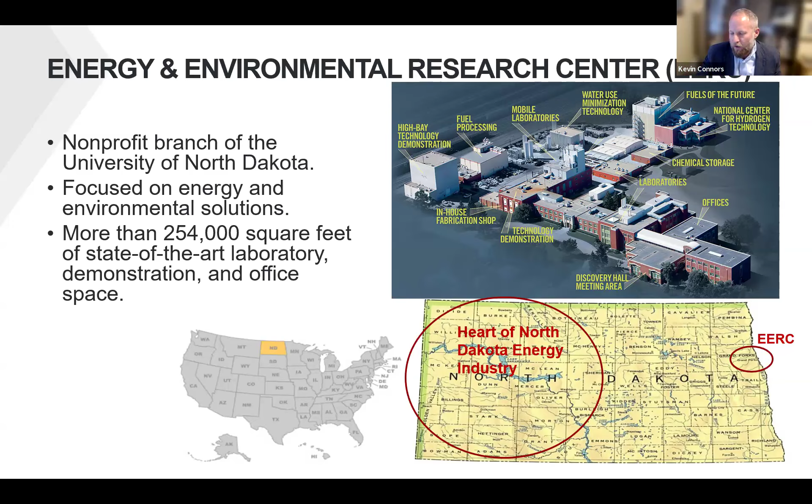The EERC has been working in CCS and CCUS for over 20 years, and that's what I'll focus the rest of my presentation on. We have a long-standing research and development program at the EERC that we manage called the PCOR Partnership. Today I manage the PCOR Partnership. We've been performing applied research in CCUS for over 20 years. We started out characterizing our region.

You can see in North America today there's 4 regional partnerships that are looking at advancing CCUS across their respective regions, and the EERC manages the Northern Great Plains, Northwestern region of North America. It's the PCOR Partnership region. It's a 10-state, 4 Canadian province region. And we started out really just characterizing the region, trying to answer the question, is CCUS a viable option in this region of North America?

We quickly got to the answer yes, and we began characterizing the subsurface, the geology, and identifying the ideal rock formations for large-scale CO2 storage. That led to pilot testing and field demonstration where we partnered with industry to do some small-scale injection. And then we had a commercial demonstration phase where we worked with an industry partner to demonstrate 1 million tons of CO2 injected and permanently stored within a 12-month time period, and we were very successful there. And today we're focused on commercializing this set of technologies.

Just want to maybe step back and talk about carbon dioxide. Carbon dioxide is a commodity. That's the position that we've taken in terms of advancing this set of technologies, and carbon dioxide certainly has a use specifically in the oil and gas industry. And Alex mentioned that in his intro through using CO2 for enhanced oil recovery.

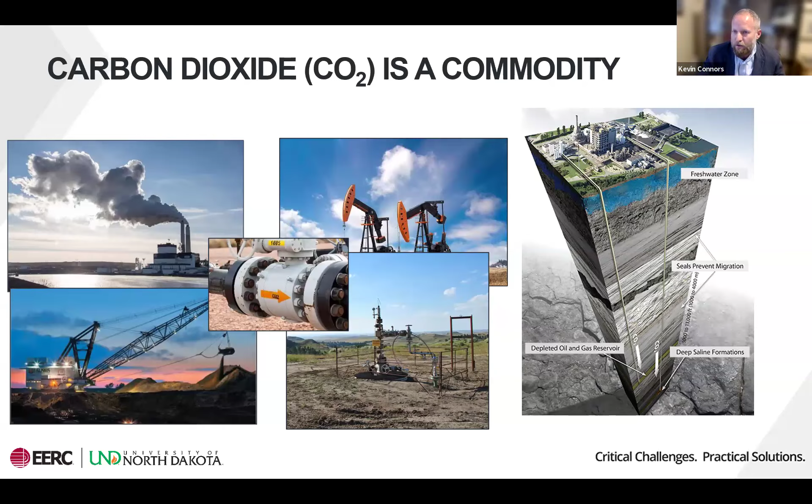Some key terminology that we're going to be using: the dedicated storage. We're talking about injecting CO2 into a rock formation that is non-oil and gas bearing. In other words, it's a high saline or saltwater formation, and the primary purpose is permanent storage.

When we talk about associated storage, we're talking about injecting CO2 into an oil-bearing reservoir, typically a depleted oil reservoir, to improve or enhance that oil recovery, so you're able to use that CO2 as a working fluid to produce more oil. And the CO2 is stored in association with that activity, and it's permanently stored in the reservoir. And I'll talk a little bit more about that process.

We have the 45Q tax credit, which today is a driver. It's an incentive for the industry to capture CO2. And the federal tax credit today is at $85 a ton for point source capture for both dedicated storage and associated storage. There's also a tax credit for direct air capture, but I'll be focused on CCUS today.

Pore space, when we talk about it in terms of the geology, is the tiny spaces in the rock grains of a geologic formation. It's going to be occupied by fluid. When we talk about porosity and permeability, those are the terms we use to describe the quality of the rock reservoir. And then I'll talk a little bit about cap rock.

These are layers of rocks that are impermeable that sit above and below your storage reservoir or the formation that you're looking to inject CO2 into, and your cap rocks are acting as a containment for that injection activity. Cap rocks are going to be naturally occurring if you have an oil and gas reservoir. They're trapping that oil and gas in place, and that's why the oil is there.

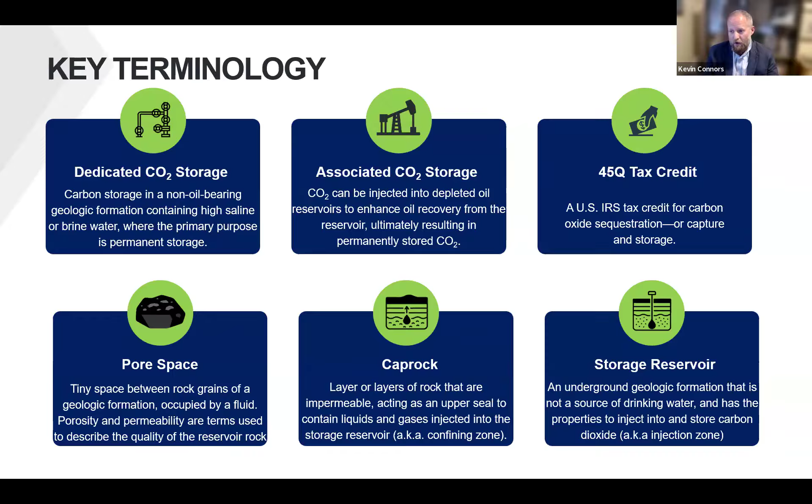We typically call that the injection zone, and we call the cap rock the confining zone. So a couple different interchangeable terms there. When we talk about carbon capture and storage, we're talking about capturing carbon dioxide off of an industrial facility, compressing that carbon dioxide and preparing it for transportation and injection, and then transporting that CO2 to an injection well. Alex mentioned it in his intro.

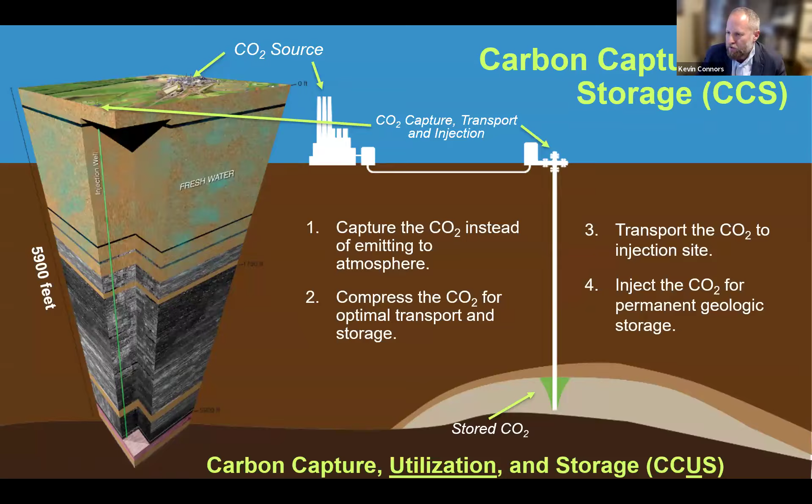So a dedicated storage injection well is a Class 6 injection well. It's been classified by the EPA for large volume CO2 injection for the primary purpose of geologic storage. So in a non-oil bearing reservoir, that's a Class 6 well. We also inject CO2 through a Class 2 well. That would be for injection for the purposes of enhanced oil recovery. And that's where we get carbon capture utilization and storage, or the U in CCUS is for utilizing that CO2 to recover more oil. So two different types of injection wells, both are regulated in a manner that protects underground sources of drinking water and protects the environment.

When we talk about enhanced oil recovery, again, capturing CO2 from an industrial source or CO2 that's naturally occurring in the subsurface has also been used since the 1970s to recover oil. So that CO2 is either captured or extracted from a reservoir, transported to the oil fields, injected into a depleted oil reservoir. That CO2 then brings pressure back to the reservoir. The CO2, when it comes in contact with the existing oil in place, causes that oil to swell. It changes the viscosity of the oil and allows that oil to flow from where it was previously trapped in those rock pores. The CO2 will replace it. Oil then becomes mobile and is able to be produced via a production well.

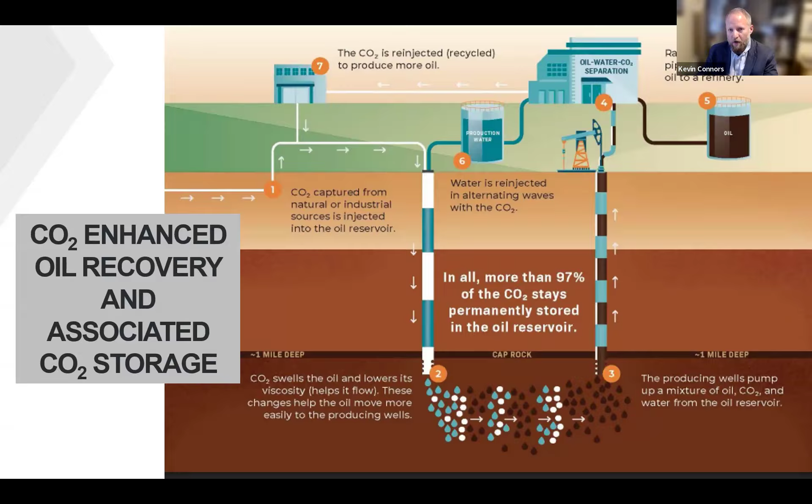So again, you're able to use CO2. In the oil industry, it's called a working fluid, and you're able to have that CO2 help produce oil that would not otherwise be produced without it. So there's great benefits to utilizing carbon dioxide to improve oil recovery. And then we also have looked at the life cycle analysis of oil that's been recovered using carbon dioxide, and it's marketable in the sense that it has a lower carbon intensity because we're using CO2 to recover that oil from the reservoir. When the oil is produced, it's also produced with CO2. They're separated at surface. The oil goes to market, and the CO2 actually gets recycled back into the reservoir and injected. So you're permanently storing that CO2 as you're using it to recover more oil.

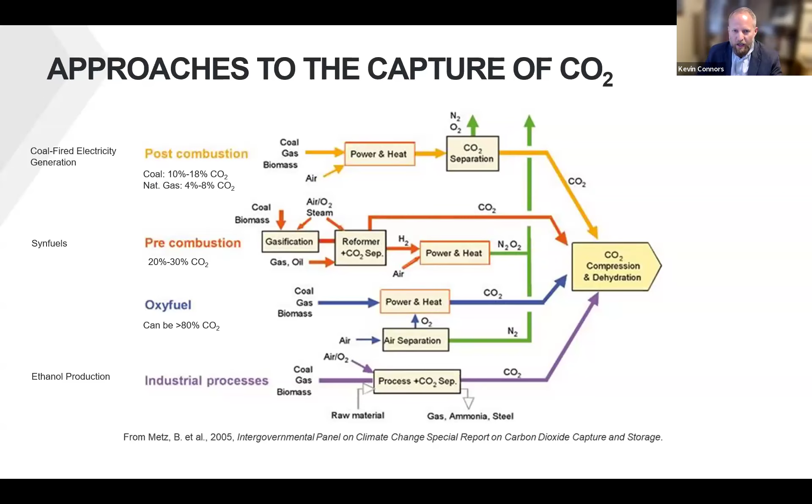We also have pre-combustion capture. I have a really good example of this from a gasification process in North Dakota, where that plant is capturing its CO2 prior to combustion of coal. So this is post-combustion, pre-combustion. And then we have industrial processes. I'm going to focus really on ethanol production, where we have examples in the United States of capturing that CO2 right off the fermentation process. And you're having a stream that's pretty much 99% CO2. So not as high cost as trying to separate the CO2 from other constituents. And that's why you're seeing ethanol facilities really advancing CCS today, and they're able to market their ethanol product as a low carbon intensity product in doing so.

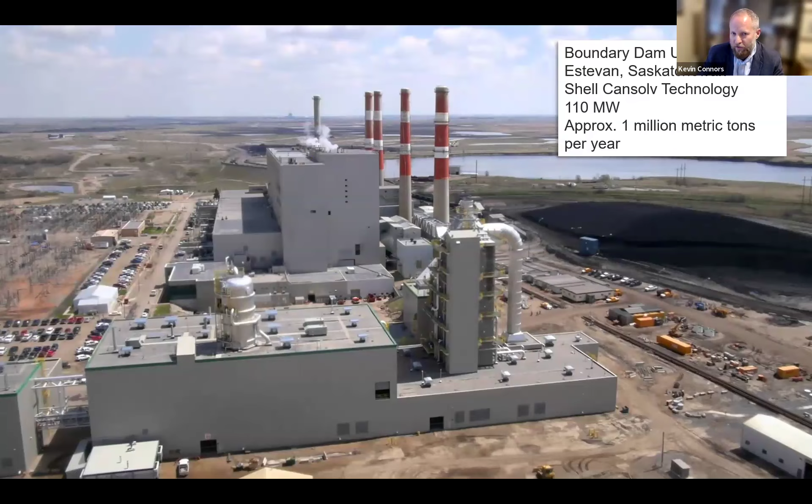So just want to give you some real examples here. We have a post-combustion capture facility in southern Saskatchewan. It's the Boundary Dam project. That's been capturing CO2 since 2014. They capture about 1 million metric tons of CO2 on an annual basis. It's a 110 megawatt plant. And that CO2 is being captured, compressed, and then transported to the oil fields in southern Saskatchewan for enhanced oil recovery. And there's also a dedicated storage well not too far from this facility where sometimes that CO2 is also going to be stored in permanent storage geologically.

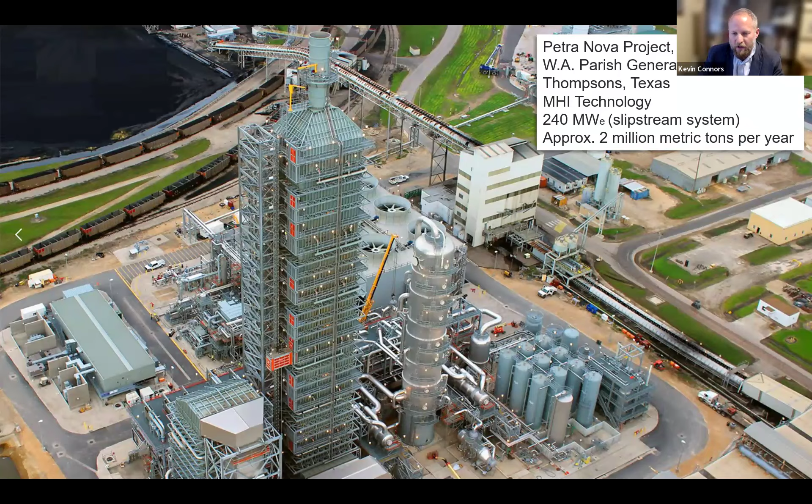Another example is we have the Petra Nova plant. It's in Thompsons, Texas, just outside of Houston. And that's a 240 megawatt electricity generation facility. And they're capturing about 2 million tons of CO2 per year, and they're transporting that CO2 to oil fields in Texas for enhanced oil recovery.

enhanced oil recovery. And they also have, just north of the facility here, a dedicated storage project that's taking a little over 2 million tons a year and storing that CO2 just north of this facility in a dedicated storage project.

And my last example is an ethanol plant in North Dakota. There's several ethanol plants in the country that are capturing their CO2 and storing it. So this is just one example. This is in Richardton, North Dakota. It's owned and operated by Red Trail Energy. And they're capturing about 180,000 metric tons of CO2 per year.

And the capture facility then compresses that CO2. Actually, there's just a really short pipeline to an injection well, and they're storing that CO2 actually within the bounds of their lands here. And they're able to market their ethanol product as a low carbon intensity product, as I mentioned. So we've talked about capture, let's talk about transport.

There's over 5,000 miles of CO2 pipelines in the United States. As I mentioned, there's both industrial sources and naturally occurring sources that you have in Colorado. And then we have an example. CO2 has been transported safely in the United States really since the 1970s. I'll talk a little bit more about a few different examples when I hone in on the Great

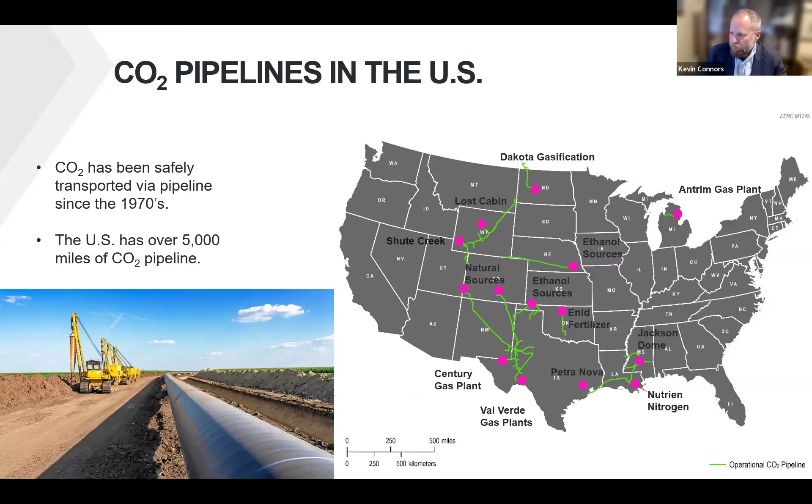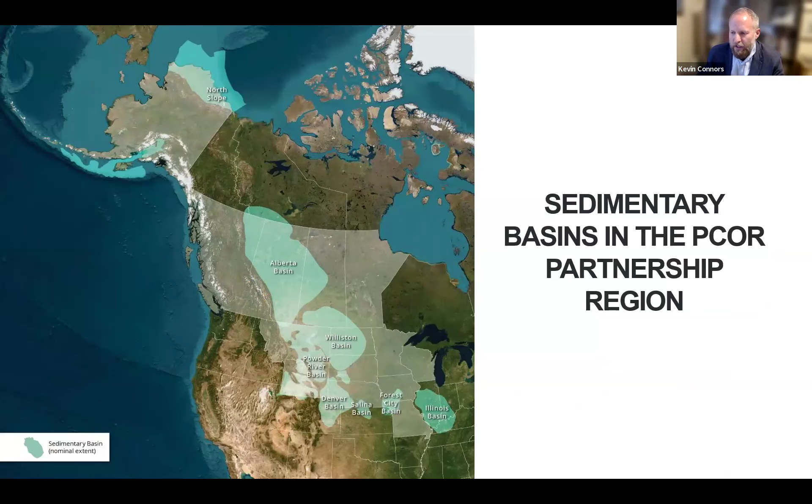I'm going to talk a little bit now about geology. I'm going to go into the region of the country I'm most familiar with, the northern Great Plains. And I want to zoom in and talk about these different sedimentary basins. These would be the locations that we target for CO2 storage, both dedicated and associated with enhanced oil recovery. And we have activities today that I'm going to be talking about further in my presentation.

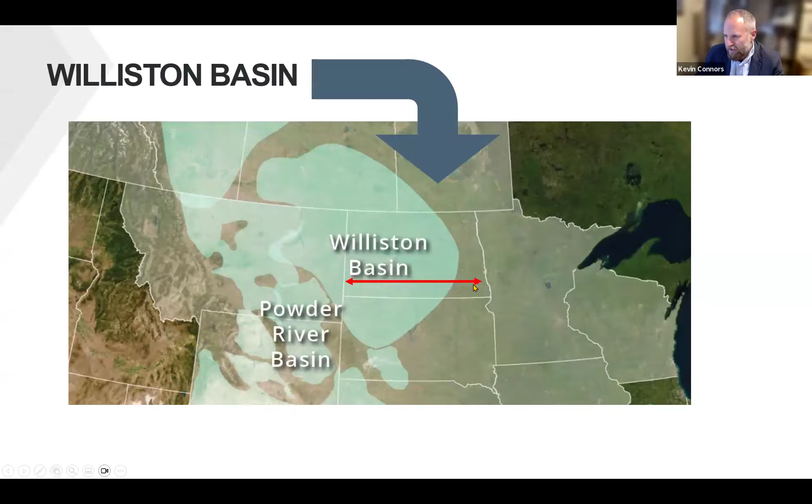But as we zoom in to the Williston Basin in North Dakota, it actually expands into southern Saskatchewan, and then also Montana and South Dakota. And I just want to point out the red line here. So I'm going to show a cross section of this sedimentary basin, the North Dakota cross section of it. And you can see here these sedimentary basins are layered with sedimentary rock formations.

This is a really great example of how we characterize the geology and look to safely inject and permanently store CO2. We start from the top down and we look at our underground sources of drinking water. We want to make sure we're protecting those. And then we have a series of rock formations that are impermeable shales, followed by rocks that have good porosity and permeability. Sandstones are good examples of that.

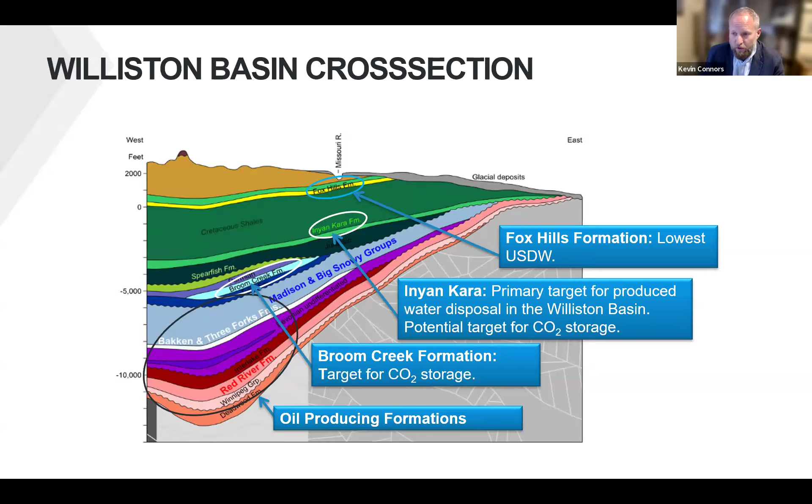So we have different formations that we use to dispose of wastewater. We have formations that we target for CO2 storage. And then below that, in the Williston Basin we also have oil and gas producing formations that are really ideal and suitable for enhanced oil recovery today using CO2. So some of the characteristics that we look for is depth.

So I mentioned when we talk about capture, you're compressing the CO2 because when you have it in a gaseous phase, it's a large molecule. CO2 is the type of molecule that when you compress it under temperature and pressure, you can really reduce down the size of it. We call it dense phase or supercritical CO2, where it actually acts more like a fluid.

And when we keep it under temperature and pressure, we're able to more efficiently transport and inject that CO2 and handle large volumes of it in that dense phase. So when we look at the subsurface, we want to be under a certain depth because as you go into the depths of the earth, you increase in temperature and pressure. So under 2,600 foot depth is really what we look for to be able to maintain that dense phase supercritical CO2.

We look for rocks that have good porosity and permeability to inject that CO2, but that also have those impermeable formations above and below that we call cap rock or containment formations. Again, we're looking at formations that aren't drinking water sources, so they have really low quality salt water in them, or they're oil and gas producing formations.

And then we also evaluate in and around the project area for leakage pathways. We look for faults or fractures, and we also look for wells that have been drilled in the past, maybe exploratory wells in the oil and gas industry, to make sure that there's no leakage pathways where the injected CO2 could then leak out of the reservoir and go up into our underground sources of drinking water.

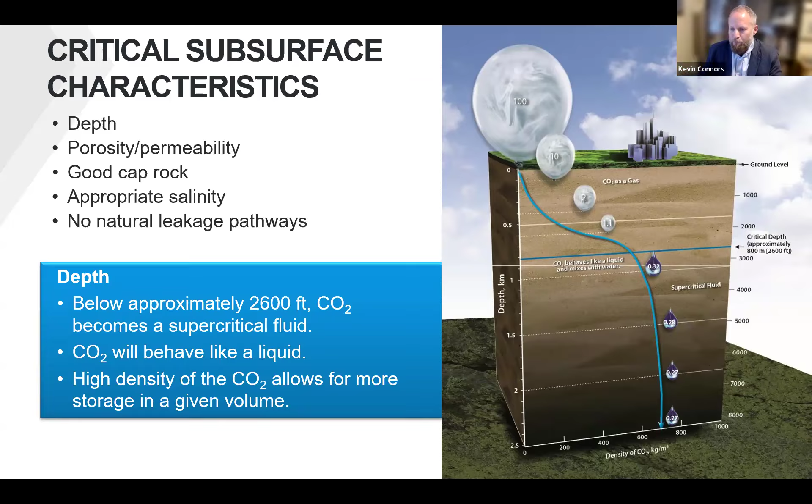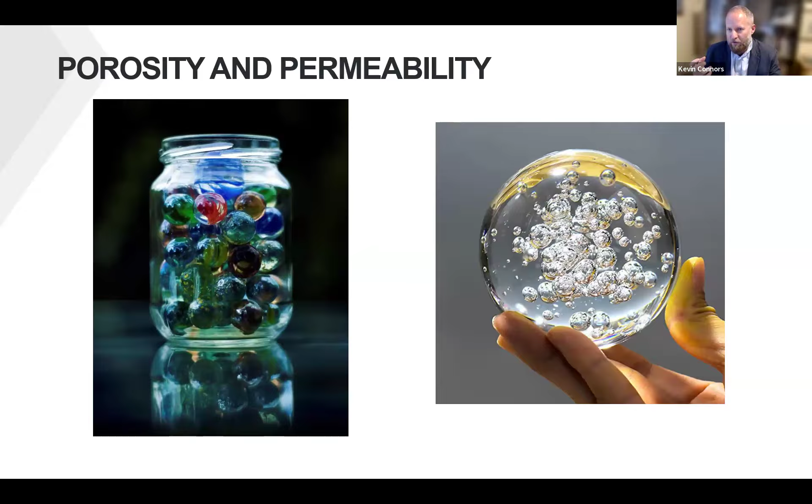Just a really simple example of porosity and permeability. The jar of marbles has both porosity and permeability. That's the pore spaces between the different marbles, and then the network that connects those pores. So that's porosity and permeability. The globe on the other side of the screen has porosity but no permeability. In other words, there's no network connecting the pores.

The rest of my presentation will be on safety and then a little bit of the activities that are occurring in our region. We really focus on protecting the environment when we develop these projects and specifically as the injection wells are designed. When we drill a well to construct it, we make sure that the fresh water is protected as we're drilling through it. We construct the well with steel casing and cement across those water zones, and then we drill through the bottom of that well to go further into our injection horizon or our storage reservoir, and then we construct that well with steel casing and cement.

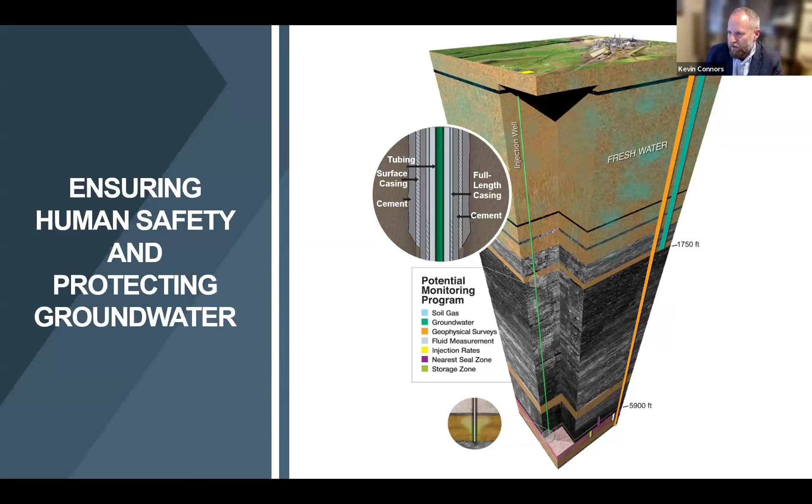So I'll give you just an example here. This is an actual injection well design, again made to protect the environment. We install steel casing and we cement that to surface, and then we drill through and we install another string of steel casing and cement that to surface. And then when CO2 is injected, there's an additional string of steel tubing and an isolation packer, and the bottom of the well in the storage reservoir is perforated. So when you inject CO2, the only thing the CO2 comes in contact with is the steel tubing, and then the CO2 is pushed out into the formation.

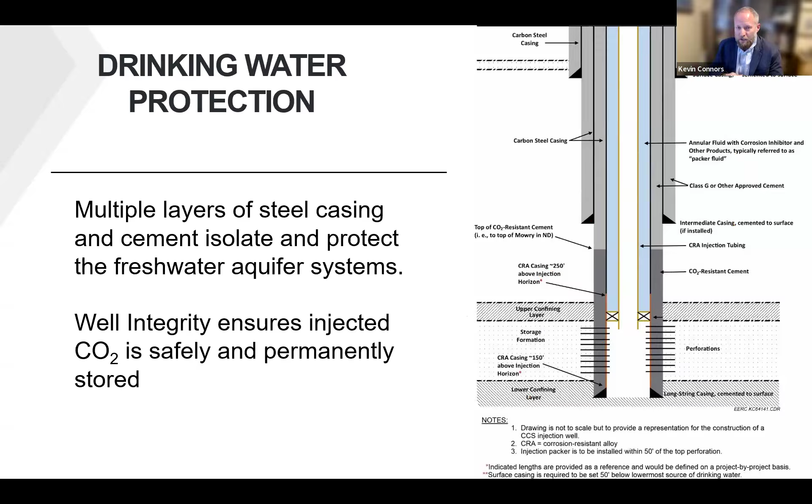You have your confining layers above and below, and this is a technology that's been in use for over 100 years in terms of these well designs. We have a very good track record of being able to inject fluids, in this case CO2, and ensure that that well maintains integrity with the multiple layers of protection. So these wells are engineered and designed with the geology in mind and also to protect the environment.

CO2 is monitored every step of the way, from the moment it is captured and compressed, through transportation and through CO2 pipelines, all the way to the injection well and injected into the subsurface. And we have technologies today that can image that CO2 once it's injected, and we can track where it goes when it's injected into the formation.

And lastly, I just want to give a perspective on the region that I'm from. We have over 40 years of CCUS operations. We have over 1,600 miles of CO2 pipelines without incident that have been operating since 1986. And we have stored safely over 176 million tons of CO2 just in the Northern Great Plains region alone.

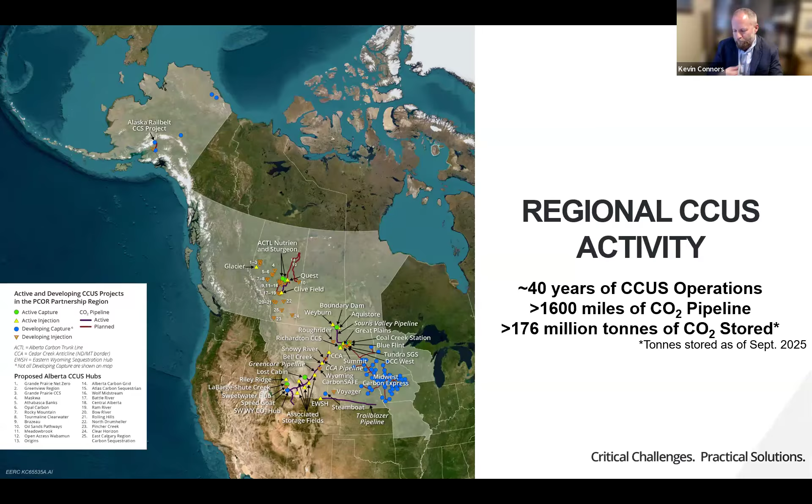Nearly 50% of our registrants either had never heard of CCUS or just know a little about it. So for those of you in that category, I certainly hope that this was useful and helpful for you, and that you feel a little bit more knowledgeable about the topic right now.

Next up, we have Dr. Josh Schaidle from the National Renewable Energy Laboratory to discuss various non-EOR CO2 utilization methods.

I personally find this a really exciting space within the CCUS field, although I've heard it referred to as kind of the redheaded stepchild of CCUS. But there's some really cool work being done in different pathways for utilizing CO2, whether it's low carbon jet fuels or building materials. I've even heard there's a company or two out there making vodka with CO2.

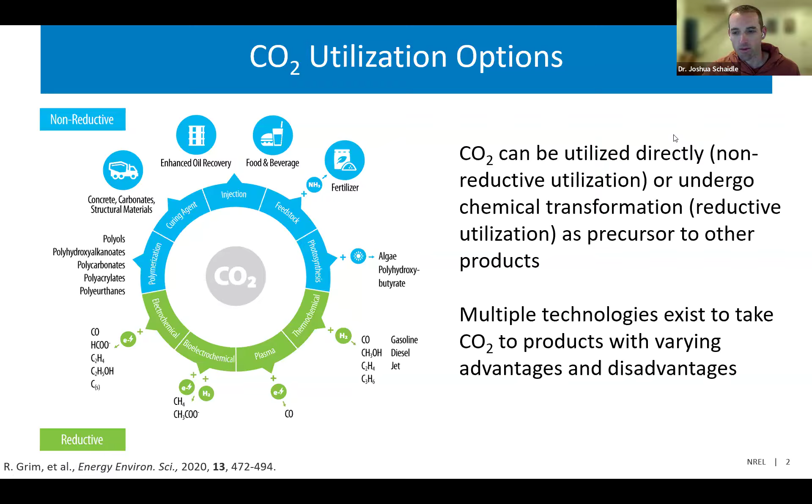More recently, the Global CO2 Initiative has taken a closer look at this and added the aspect of time. So on the left, what we're showing here is many of the same products that were highlighted on the last screen, but now on the x-axis, we're highlighting what is the amount of time estimated to get to 10% market penetration. And so what you'll note here is we're not talking about 10% market penetration for most of these products in 5 years. We're talking about 15 to 25 years. And so that's important to take into account that many of these processes are capital intensive, and it takes time to scale up and build out these technologies.

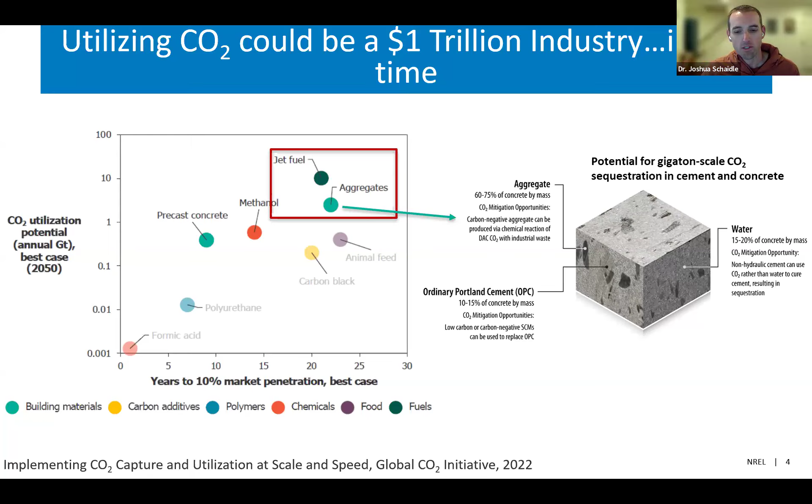Now, importantly, if we want to touch on that jet fuel piece, there is a brutal reality that we have to face. And that reality is that when you're taking CO2 and trying to produce a fuel, most of the fuels we utilize today are liquid hydrocarbon fuels. So they are made up of predominantly hydrogen and carbon. Now, CO2, you're starting with 72 weight% oxygen. So less than 30 weight% of your feed is carbon, which is that core building block for your hydrocarbon fuels. And of course, your CO2 is neither free nor pure.

Secondly, you're starting with a combustion product. When you combust a hydrocarbon, you produce CO2 and water. And so CO2 has no inherent energy content. So in order to take CO2 and make a fuel product, you have to put in a lot of energy in various forms, whether it's heat, electricity, hydrogen, to produce that end product.

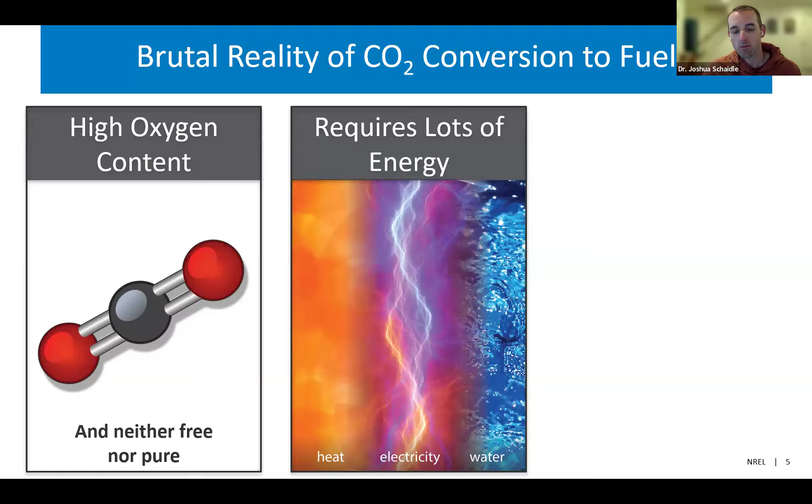And then finally, Kevin hit on this already. While we do have some existing pipeline infrastructure, much of it built out for enhanced oil recovery and others being proposed, it's still fairly limited. And so this is an important consideration as we think about how would you build out infrastructure for CO2 utilization in terms of where you site the facilities and how you scale those and how you get the CO2 to those facilities.

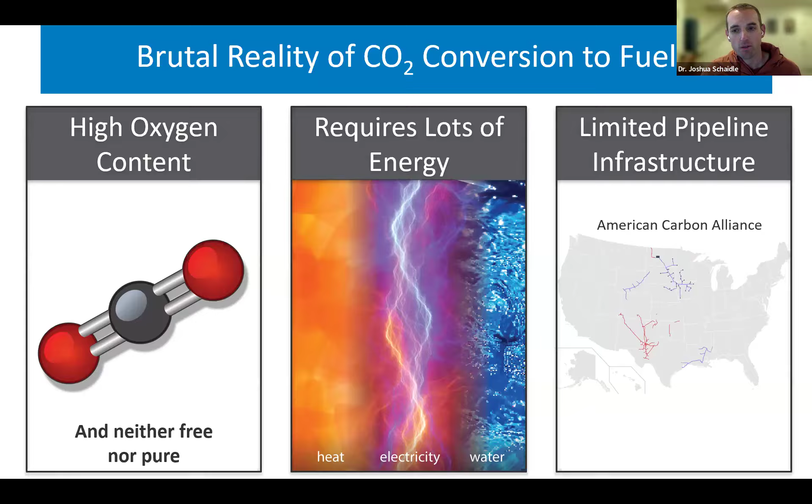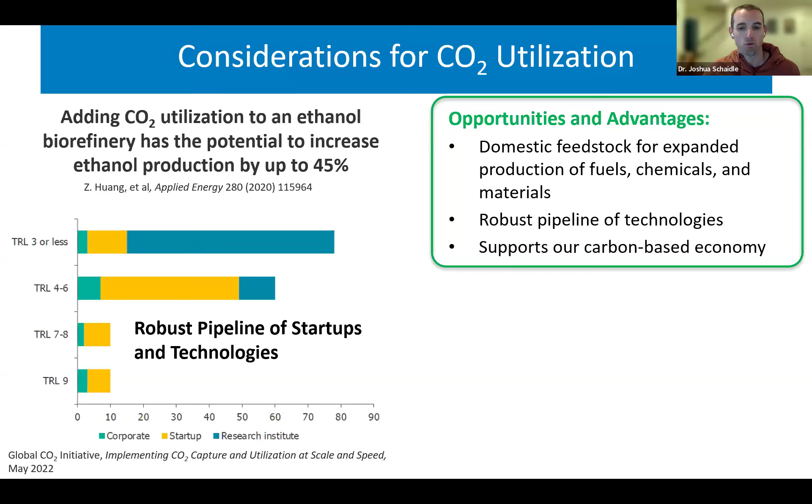Now, some of the challenges are many of these technologies that are being developed, they've developed a step, a unit operation, but a limited amount of full integration of the process and have limited work so far on scaling up. There are some examples of commercial processes, but in many cases with these earlier stage technologies, they have limited experience on the scale-up side. We talked about the energy demand, but how you supply the energy when you think about the scale of these facilities is a considerable challenge. We'll talk about cost in a moment, and then matching the scale of the CO2 feed stream with the scale of the CO2 conversion needs and the process needs that you have is also a consideration.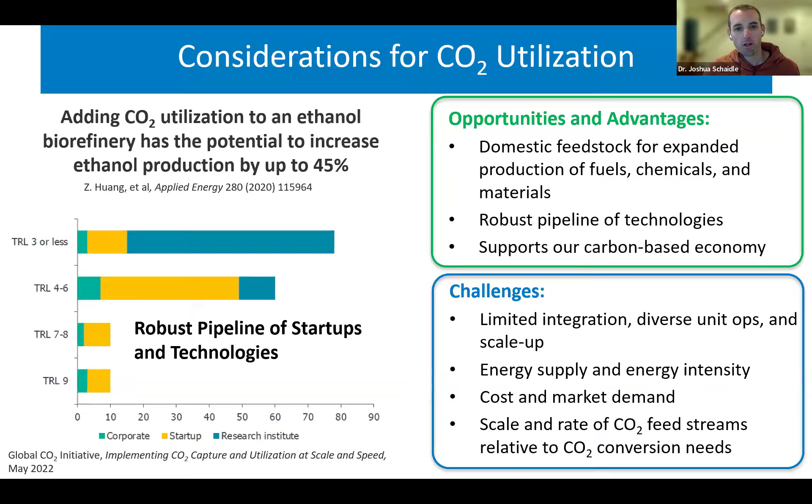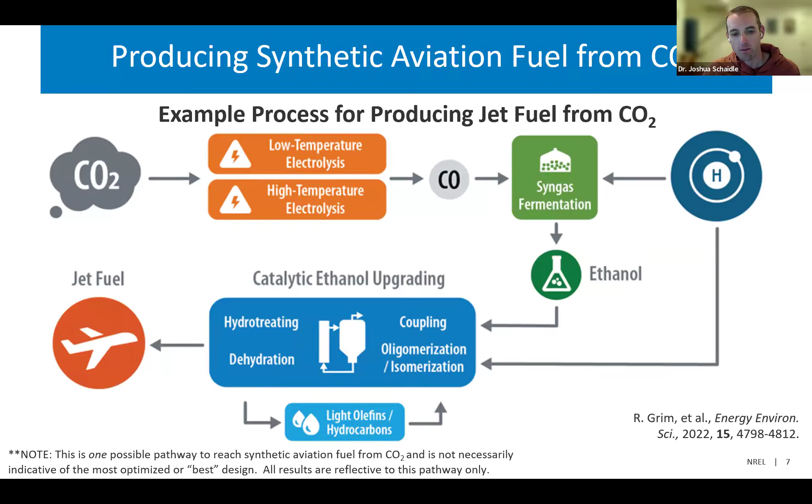So what I want to close by is highlighting one specific example. So if we think about producing synthetic aviation fuel from CO2, and I'm just going to use this process up here as an example. It's not meant to support or advocate for any one pathway. It's not the best pathway. It's just saying this is a pathway that we evaluated for producing jet fuel from CO2. And as you can see, this is a multi-step process. And we performed an analysis and a process model around this entire end-to-end approach. And what we wanted to highlight was the impact of the source of the energy and the source of the CO2 on the cost of producing that jet fuel.

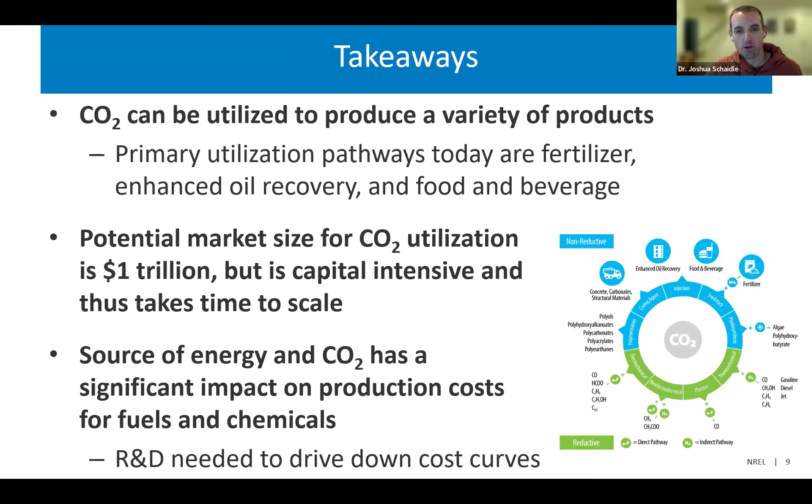So key takeaways at the highest level: one, CO2 can be utilized to produce a whole variety of products. The ones being utilized today commercially are fertilizer, enhanced oil recovery, and food and beverage. The potential market size for CO2 utilization is on the order of $1 trillion, but we need to recognize that this is capital intensive, and thus it takes time to scale and penetrate into those markets. And then finally, the source of energy and CO2 has a significant impact on the production cost for fuels and chemicals specifically, and we need further R&D to help drive down those cost curves.

So thank you very much. Great. Thank you so much, Josh. And I apologize about my stepchild comment. Not a worry. I was just joking with that one.

I really do find this to be a really cool aspect of the CCUS industry, utilizing CO2 and turning it from a waste management problem into a commodity. A lot of startups out there with totally differing ideas on how to go about that, and it's just a really cool part of the industry to see. And like you said, a trillion dollars of opportunity, which is super exciting in my opinion.

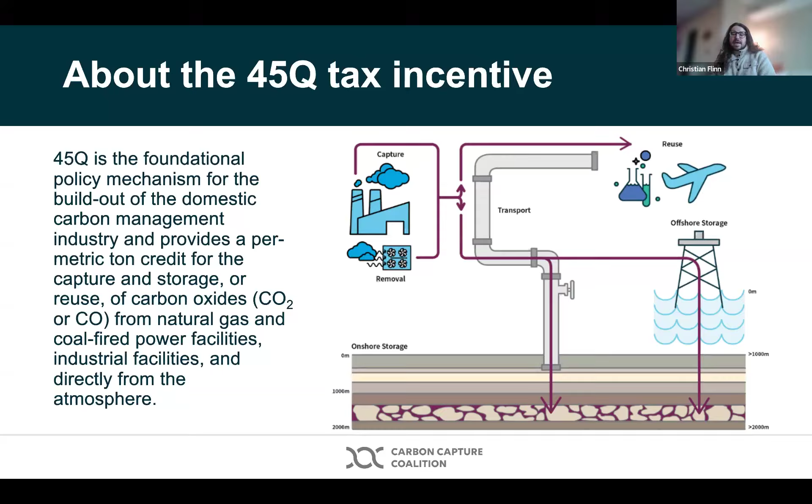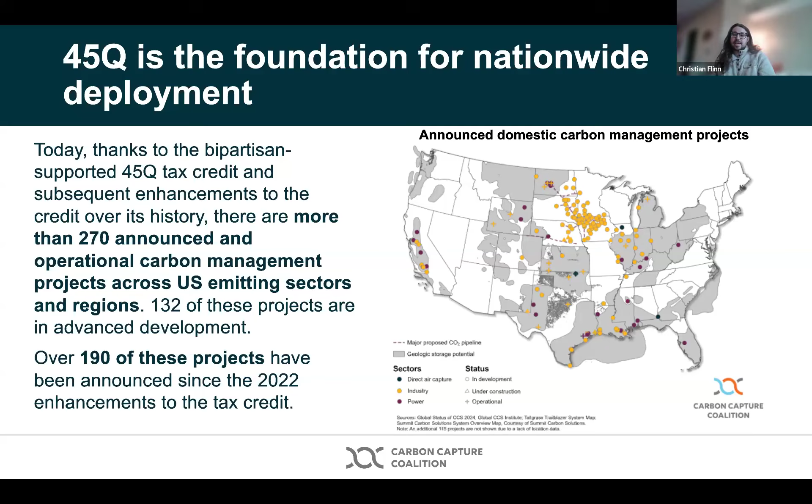And the reason 45Q is important is because it is the foundation for nationwide deployment of carbon management technologies. If you'll take a look at the map that's on screen, and I apologize if it's a little small, but you're going to be seeing that the number of announced domestic carbon management projects has really grown, especially since 2022, which is when the most recent enhancements to 45Q were announced. Originally, we were looking at around 140 projects in 2022, and that has now ballooned to over 270 announced and operational carbon management projects. So that's really good news, and it's indicative of 45Q's impact on the industry and its ability to attract investment.

So just a little bit of background of 45Q as of now. In 2008, 45Q was established. There's been a number of enhancements through the Future Act, guidance from Treasury in 2021, which was fundamental to really helping investors claim the credit. Then the Inflation Reduction Act was enacted, and that created some further enhancements and raised credit levels. And then in 2024, direct pay and transferability provisions were finally implemented by the IRS.

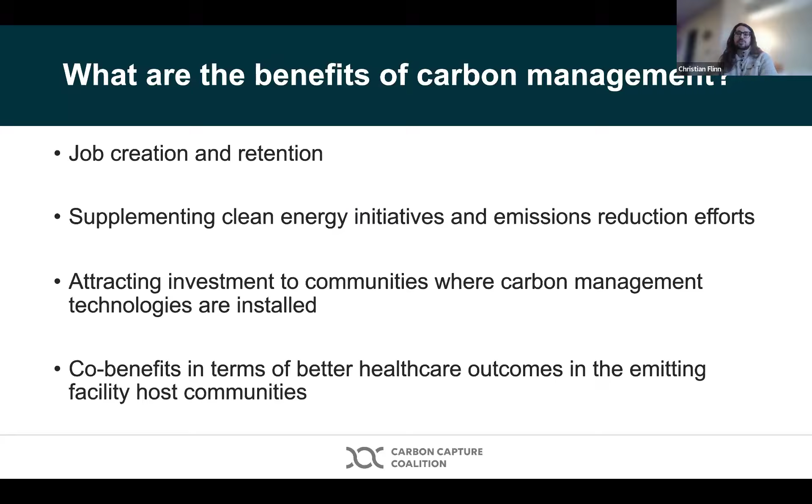So what are the benefits of carbon management? So as I've touched on a little bit, we have job creation and retention, supplementing clean energy initiatives and emissions reduction efforts, attracting investment, and co-benefits in terms of better healthcare outcomes. This is especially true for communities that host emitting facilities, or, for example, a natural gas plant, as you'll see in the next slides.

So first off, touching on carbon management as a job creator, the Carbon Capture Coalition is convened by the Great Plains Institute, which commissioned a study that looked at industrial facilities, power plants, and the build-out of associated CO2 transport infrastructure in 21 states across the Midwest. And what that showed us is that these regions can support an annual average of up to 68,000 project jobs and over 35,000 ongoing operational jobs over a 15-year period.

Then the next piece of the puzzle is carbon management's role in reducing global emissions. So 2 major international organizations have agreed that carbon management is an essential component to reduce emissions to meet climate targets. If global energy demand does not change drastically over the next decades, the idea is that we're going to need over 1,000 megatons of CO2 stored by 2030 and 6,000 by 2050 in terms of carbon capture capacity, I apologize, if we are hoping to meet net zero emissions.